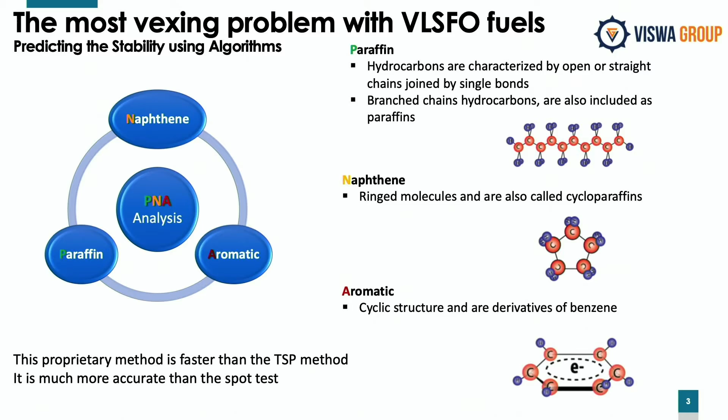So the most vexing problem with VLSFO, as you all know, is the stability issue. It's not easy, because when you take the fuel in, everything deteriorates. TSP values go up, and then you find that your purifiers are choking, your filters are choking. So the stability, which is the ability to stay stable during long-term storage, is not happening.

So, from the Viswa Group, I can say that we have developed a proprietary algorithm based on PNA studies, paraffin, naphthene, and aromatic content in the fuel. We are able to predict what will happen to the fuel, and whether it is safe for you to bunker it for, let's say, 30-day usage or 60-day usage. And we also are in a position to recommend some additives which will help.

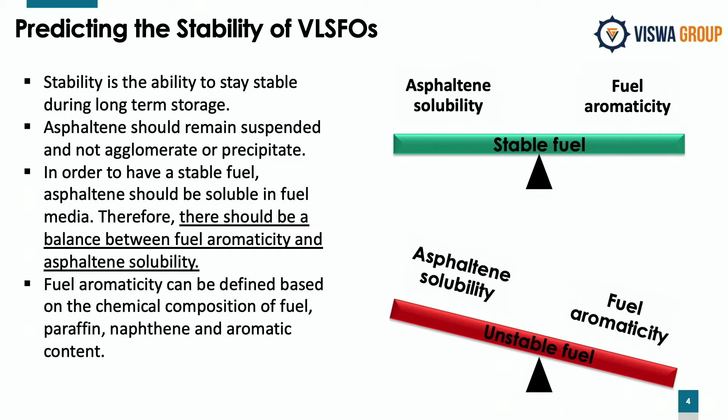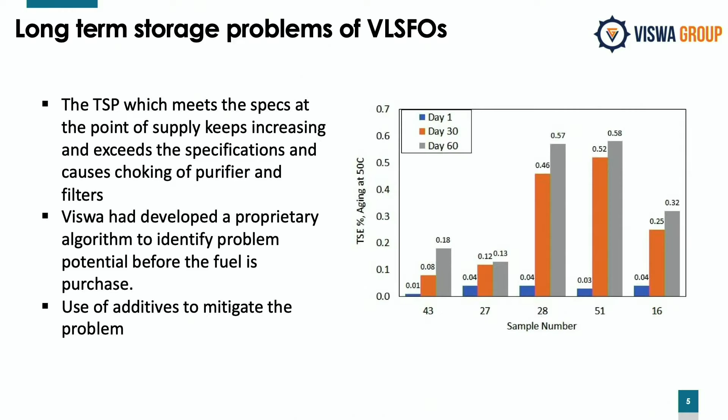Next one. So long-term storage is a big problem because this is completely out of the control of the fuel buyer, because when he's buying a fuel which is in spec, but after 2 weeks, 3 weeks, he finds that it's gotten out of spec and he's experiencing all the problems. So how to solve the long-term storage problem, how to look at the sediment problem, how to look at the cold flow problems - these are all the problems of VLSFO, and we can't say that we have completely solved it. There are a lot of problems, and we need to address them and find solutions.

The next one. So what's the future scenario? In fact, this is the one that I wanted to start this thing. So IMO was afraid that 2020 was going to be the Y2K of ocean shipping. This did not happen. Then they predicted a high spread between high sulfur fuel and very low sulfur fuel. That did not happen. They said it would be $250 to $425, but it's kind of $50 to $60.

So if it was high, then it was supposed to trigger a huge number of scrubber installations. Now, because the spread is only $50, $60, return on investment on scrubbers is 4 to 5 years, not at all attractive. So in the past 8 months, no fresh scrubber retrofit deals have been signed. There have been deals signed on new ships, but not any retrofit.

So COVID has trumped all predictions, and COVID stopped the complete airline industry. 70% of the planes are idle, so there is plenty of jet fuel that is being pumped into the VLSFO fuel, bringing down VLSFO price. It's being added on to the distillate fuels, bringing down distillate fuels. That's the reason why VLSFO fuel and distillate fuel are almost at the same price. And jet fuel recovery will only happen when the airline industry recovers, and they're predicting another 2 years for that.

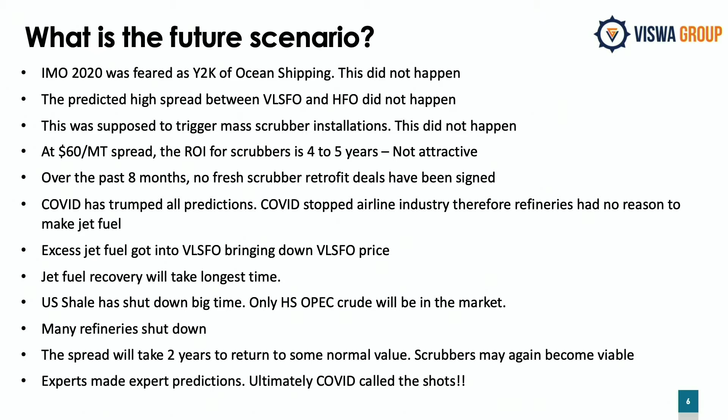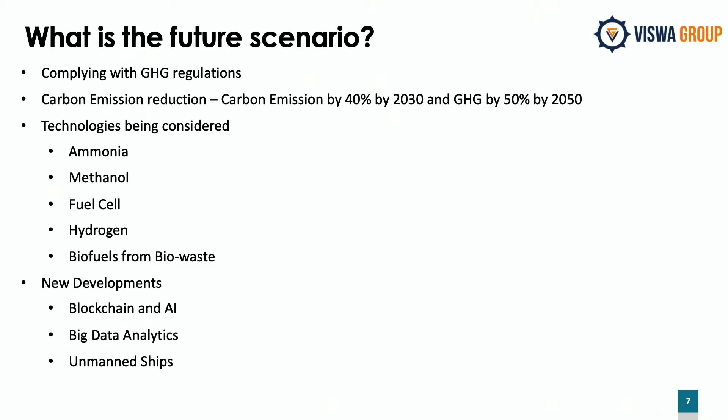The GHG regulations are coming in, even before these regulations have settled in, with carbon emission reduction targets of 40% by 2030 and 50% by 2050. Technologies being considered include ammonia, methanol, fuel cell, hydrogen, and biofuel from biowaste. The industry is also experiencing new developments like blockchain, artificial intelligence, big data analytics, and unmanned ships. All of this is going to make this industry nothing like what it is today, very, very different.

The next speaker is Dr. Aparna Balachandran from Viswa Group. She's a director at the company. Go ahead, Aparna.

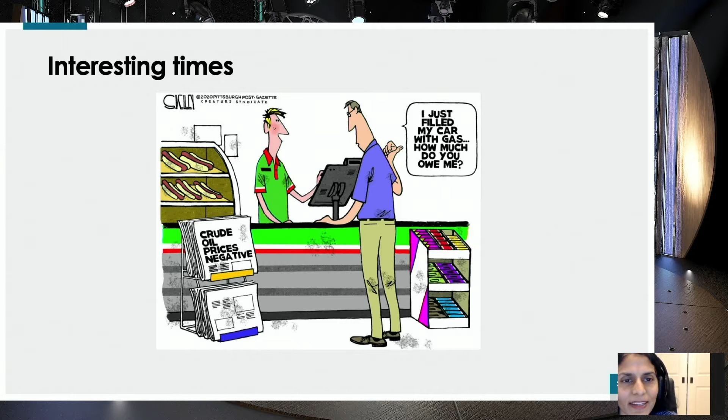On a more serious note, the topic I'm presenting today is 2020 VLSFO fuels. Specifically, what is the current situation? What are the benefits and disadvantages of this fuel? And what are the solutions to solve these problems? Next slide.

First, let's define what an average VLSFO looks like, and can we truly characterize it? On the slide you can see the average values for some of the ISO 8217 parameters. For example, the density is 936, the viscosity is 106. But if you look at the maximum values, these are much higher, and this represents a wide range of what is considered normal for VLSFO fuels. The bottom line is that VLSFOs are a heterogeneous group with lots of parameters that range widely, and they're all clubbed into one group. Next slide, please.

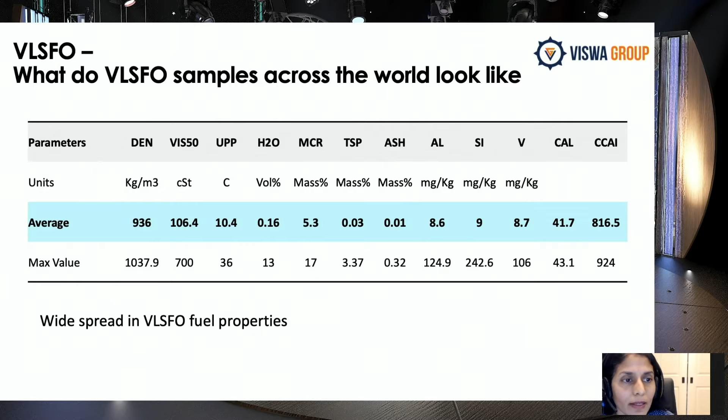Based on our testing of more than 50,000 samples in 2020, we found that VLSFOs account for 59%, distillates were 31%, HFOs 8%, and ultra-low sulfur fuel oils were 2%. You may wonder why distillates account for such a high percentage. There are many reasons, including the crash in oil prices, COVID, and jet fuel availability, as Dr. Viswa had alluded to. Viswa has done a lot of research and published white papers on the quality of VLSFOs, and we've put together a comprehensive compendium which covers all aspects of VLSFOs. Next slide, please.

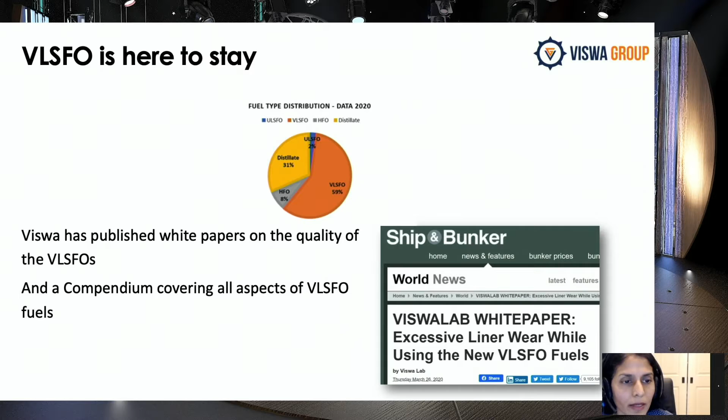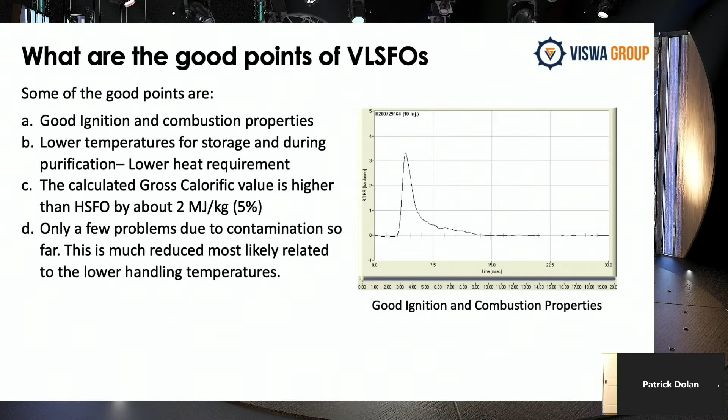So what are the benefits of VLSFOs? The paraffinic VLSFOs have good ignition and combustion properties. Almost all VLSFOs require a lower temperature for storage and during purification, leading to a lower heat requirement. The calculated gross calorific value is higher than HSFOs, leading to a 5% increase in thermal efficiency. And only a few problems have been seen so far related to contamination from polymers, and this is much reduced, most likely related to the lower handling temperatures required for VLSFOs. Next slide.

Long-term storage problems have accounted for almost 80% of VLSFO-related problems. There are two ways to identify them: one, which is a little more logistically challenging, is to let the fuel be stored and then tested prior to usage. The second way is to do predictive modeling and use proprietary algorithms prior to using the fuel and storing it. This can be done at Viswa, and we can predict whether the fuel will stay stable for the long term or not. Some additives have helped if they're dosed adequately at the start, prior to storage of the VLSFOs.

The next most frequent problem we noted was cylinder liner wear, which I'll discuss later. The third problem we saw was cold flow properties and wax formation in tanks. The important point here is that pour point is required by ISO 8217 testing, but our data analytics showed that pour point had no correlation to the wax appearance temperature. So if the fuel could not be heated, wax formation could happen. And the key to remember is, in the unlikely and unfortunate situation that wax does form, the fuel has to be heated to a higher temperature, called the wax disappearance temperature, prior to being used.

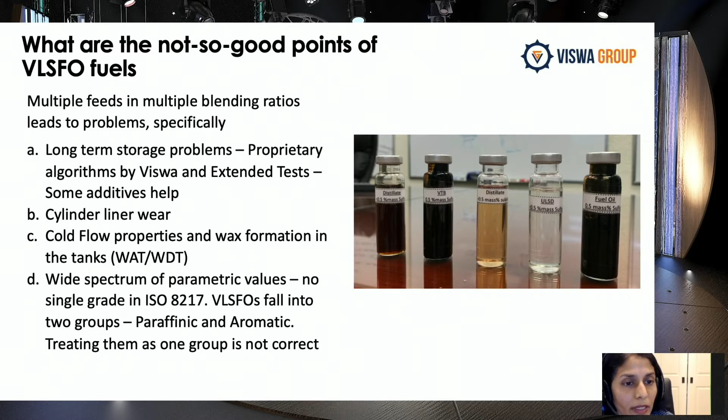So based on the problems faced by our customers and our experience, Viswa has published these technical updates and white papers relating to these problems. Next slide, please.

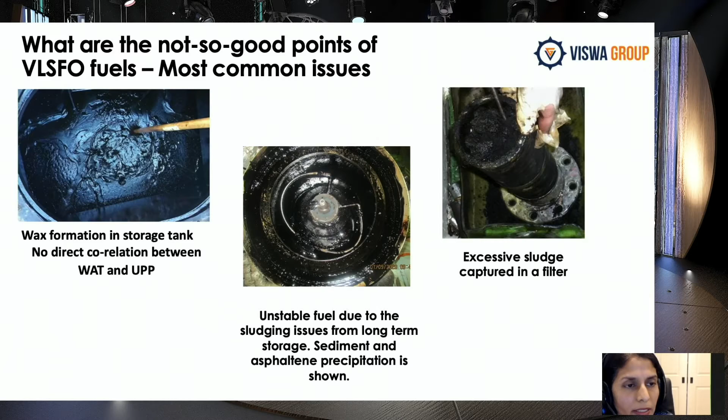This is what problems with VLSFOs look like, with wax formation on the left and unstable fuel from long-term storage causing sludging issues on the right. Next slide, please.

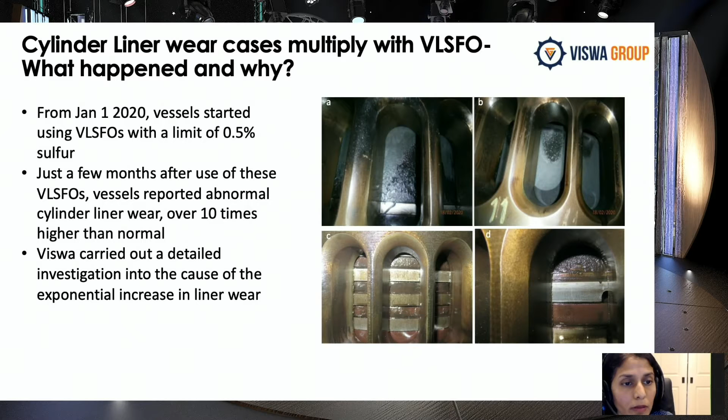To touch briefly on cylinder liner wear, what was noted was in January 2020, VLSFOs were used with a limit of 0.5% sulfur, and vessels started reporting an exponential increase in cylinder liner wear. This was quite puzzling to everyone. Next slide, please.

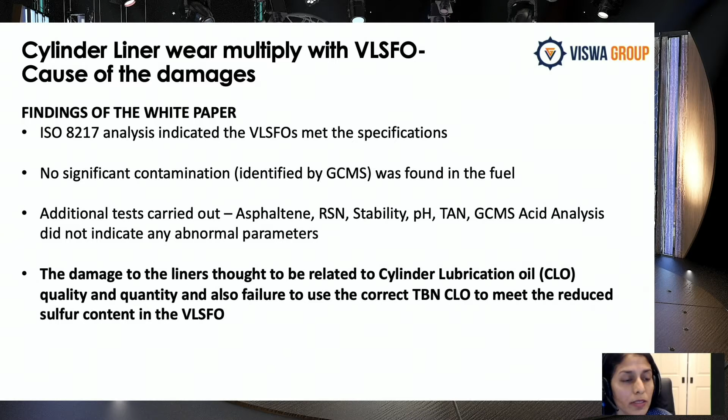The ISO 8217 analysis indicated that the VLSFOs had met the specifications. Additional testing was done, and none of these indicated any abnormal parameters. So finally, it was concluded that the damage to the liners was thought to be related to cylinder lubricating oil, both the quality, the quantity, and the failure to use the correct TBN cylinder lubricating oil to meet the reduced sulfur content in these VLSFOs.

Next slide, please. I want to close with a summary of what I have presented. VLSFOs will probably be used widely in the near future. Given that they're a heterogeneous group of fuels, they should be used carefully and with a clear understanding of all their different properties. I want to thank you all for your attention.

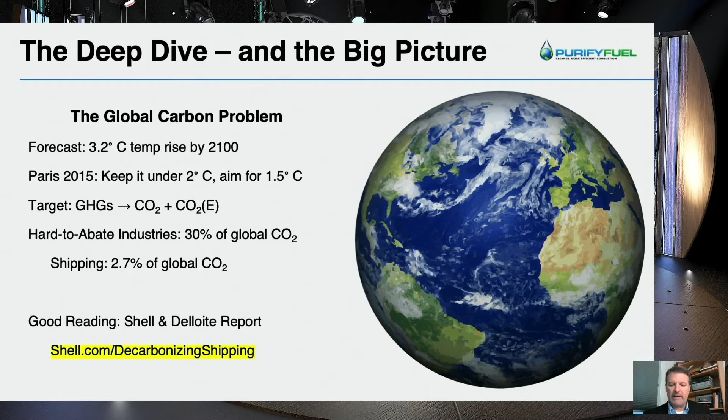So we note that all global carbon emissions, 30% of those are considered hard to abate industries, of which we're one of them, shipping, and we're 2.7% of the global CO2 problem. I want to point out one good reading item here that I pulled some of these numbers from, and that's the Shell report that they did in conjunction with Deloitte. Just Google Shell and Deloitte and decarbonizing shipping, very useful. Okay, let's go to the next slide.

So bringing this home to our industry, there's a lot of good ideas out there, but very few clear pathways, at least today, to pursue, and a lot of compromises that come with those even. We've got billions of dollars tied up in marine power plants and burning lower sulfur distillates and residual fuels. We just cleared a major hurdle this year with the IMO 2020 with the sulfur regs.

We're still working out some issues with the replacement fuel, which is VLSFO. Dr. V can give you a lot more information on that. We don't control the supply chain of energy. We've historically been buying the lower end of the hydrocarbon value chain in IFO, and we kind of have to take what we get. This has been a hurdle, not just for us, but also for the people that produce the fuel, the refining industry.

The IMO's focus over the last decade has been reducing sulfur, which has been helpful to human health, with a bit of environmental benefit, but now they've really turned their attention to carbon. From baseline levels in 2008, the IMO is thinking about a 40% reduction by 2030 - that's a pretty big first step. Then getting up to 70% off this 2008 baseline, with a specific breakout of 50% for greenhouse gases. There's a differentiation between carbon and greenhouse gases, even though one is the other - certain gas emissions have a much higher weight, and you'll see a result of that later on.

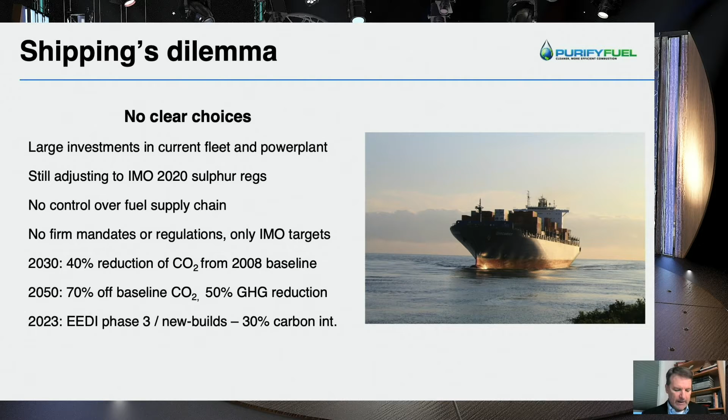So let's look at some areas to focus on. This is where work is already underway. We can look at hard technology advancements. We can look at alternative fuels - less carbon intensive, all the way to carbon neutral. We can look at improving what we have now, and I'm going to spend some time on that. And of course, the last option is not really an option.

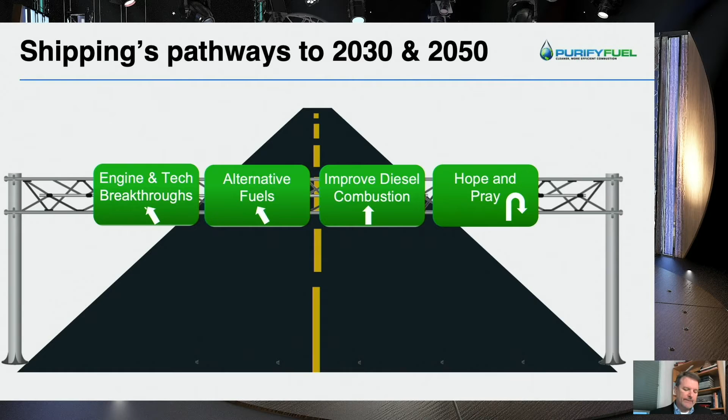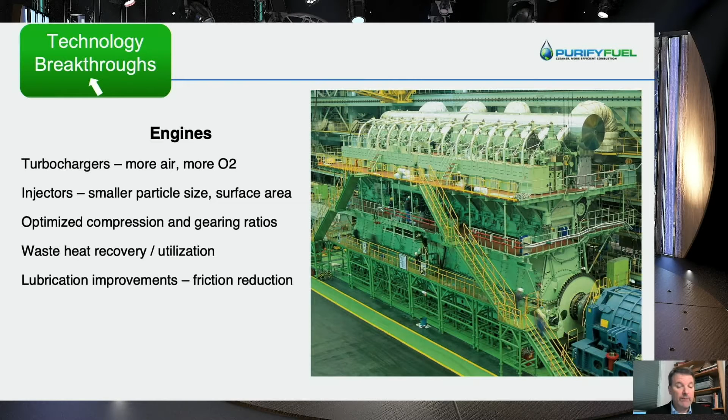Touching on the first area - technology breakthroughs. Lots of capital and R&D has been spent and continues to be spent making these incredible, huge engines that power these ships. Advancements in turbochargers and injection systems have helped improve combustion, and we're even harnessing more of the heat energy that goes up the stack to power other shipboard needs that would otherwise be parasitic loads on the engine. Advancements in friction reduction and lube oils have helped save energy and extend the life of these big investments as well. I don't have individual numbers for these things, but every single digit improvement in technology breakthroughs is going to help us get there. Keep in mind, we're heading for 40% in carbon reduction.

There's all kinds of other cool ideas that have been introduced, and some reintroduced. You see articles about hybrid power, LNG, new propeller design, and hull design. I'd remind you that picture to the right, the bulbous bow, is only a few decades old, and it was a big improvement in hull efficiency.

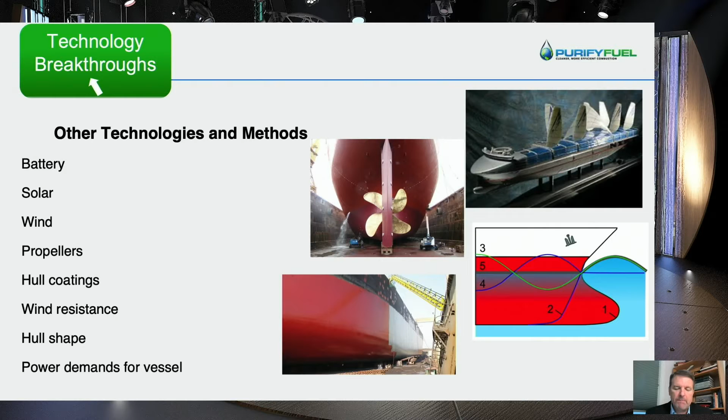The session after ours today is going to cover some of these specifically in depth. I just mentioned LNG, but there's also other alternative fuels being looked at much more closely, including hydrogen, either through combustion or through fuel cells. We've got ammonia, which is a large carrier of hydrogen, methanol, biofuels, and even nuclear. They'll get into that in the next topic.

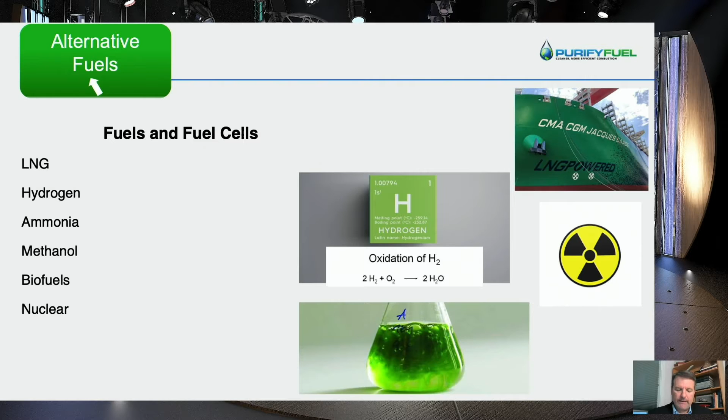Theoretically, a drop of marine diesel or IFO has a finite amount of potential energy when it runs through an engine. How much of that can we harness by running it through an engine that has limitations right up front? You can see that 100% theoretical is truly going to be about 75% theoretical because of heat, friction, and inertia. Due to the nature of diesel combustion, the cycling of RPMs, and varying loads, you can see what different modes of transportation using diesel get today. Cars and trucks, because of RPMs and cycling, locomotives and tugboat engines are getting around 35 to 40%, and large ships - two-stroke, slow-speed, large diesels - are actually in the 40s and even approaching 50%.

But that still leaves 25% room to improve. So the question is, do we keep working on engine design with a lot of money and R&D - which I recommend we do? But what about fuel? We haven't really talked much about that. I'd say that except for the sulfur that's come out of it, the diesel we're burning today is not that different than the diesel we were burning 10, 20, and 30 years ago. What we burn is a function of what is yielded by cracking crude oil into diesel and IFO.

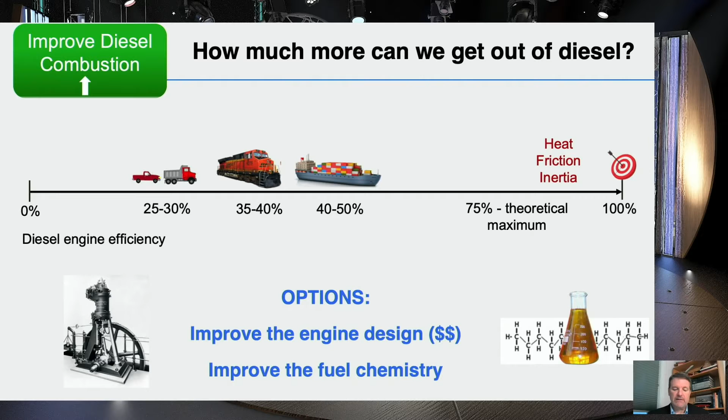With diesel, you hear about a couple of attributes of the fuel that have to do with its quality of burn, the injectors, and the ease of combustion. Cetane and lubricity are two of the things in our product, but we've also added a third: a nanoscale cerium oxide that acts as a catalyst for oxidation. That's really been the game changer for us.

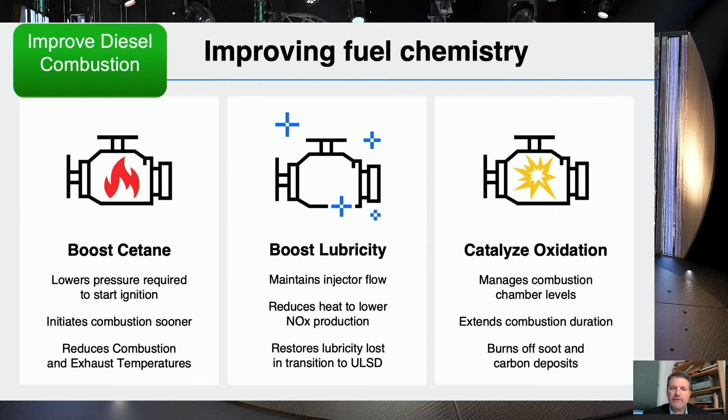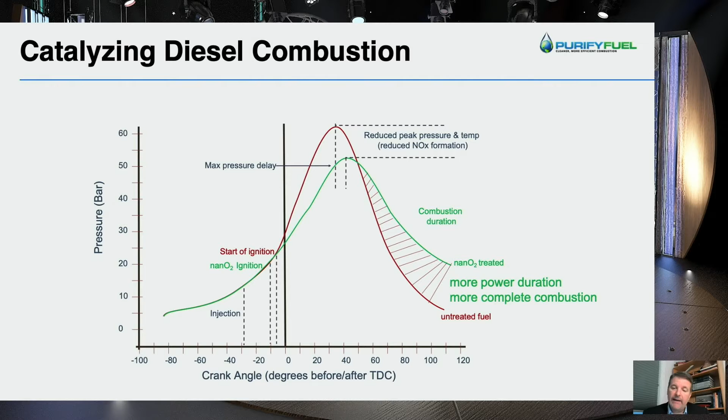The numbers that come out of this are pretty noteworthy. This shows two independent, third-party tests done in controlled environments. One on a four-stroke engine, a smaller one done at the Houston Advanced Research Center, conducted at UT Austin, and another done at NRE Power Systems on a dynamometer down in Houma, Louisiana.

On an EMD 3,000 horsepower two-stroke, the upper white box shows our fuel savings at different engine loads. You'll see those range anywhere between about 6.5 to 14% on the four-stroke and about 7.5 to 10% on the two-stroke. What's really interesting is the lower box shows you the emissions reductions that we noticed.

Particulate matter, or soot, is in the 50s. Carbon monoxide, which is an indirect greenhouse gas, is in the 17 to 30% area. NOx we measured on the NRE test at 20%, which is a big chunk, and the VOCs we measured on the four-stroke.

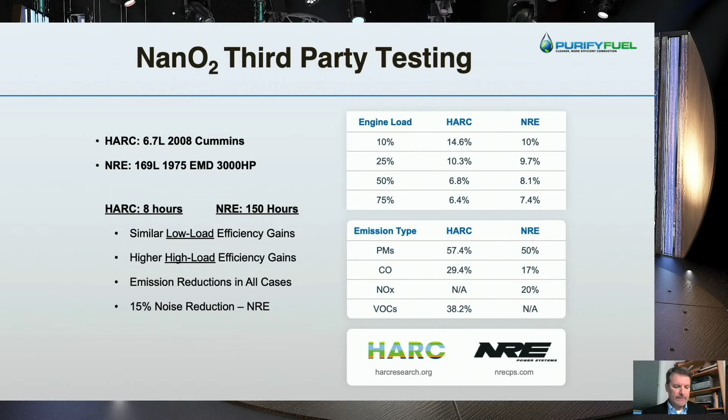So those two independent tests are at the bottom of these rows, and above that we've got actual field study tests that were done in our fracking and drilling and mining, coal hauling industries, as well as short line railroad.

The first column was filled in for all of these, ranging anywhere between probably 8% all the way up to a noted 17% in terms of fuel savings. Many of these industries enjoy the fuel savings, but the workload improvements are even better because they can take mechanical advantage, not just the chemical advantage of the combustion.

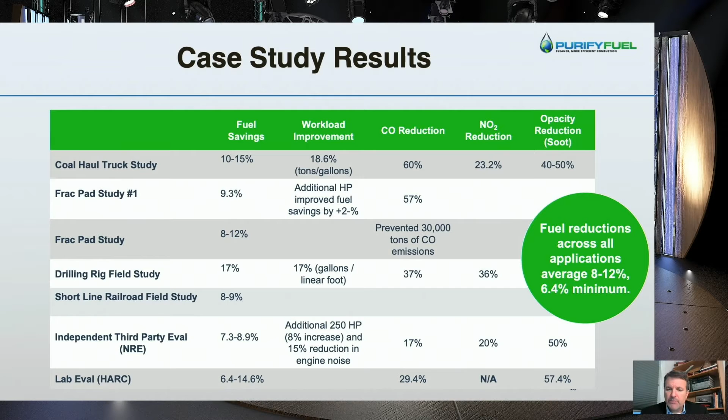Carbon monoxide reductions anywhere between 37 and 60%, NOx reductions, NO2 in this case, and then opacity. So in the field, we seem to do even better than in the lab, which is very encouraging.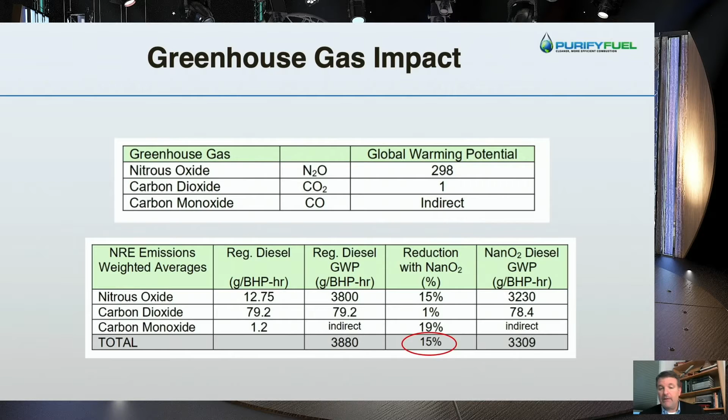Remember, we're targeting 40% by 2030. If these numbers hold, and they do through all the different tests and all the different gases that we measure, this shows that we are about 15% towards the 40, which is a pretty big chunk right up front without any capital investment.

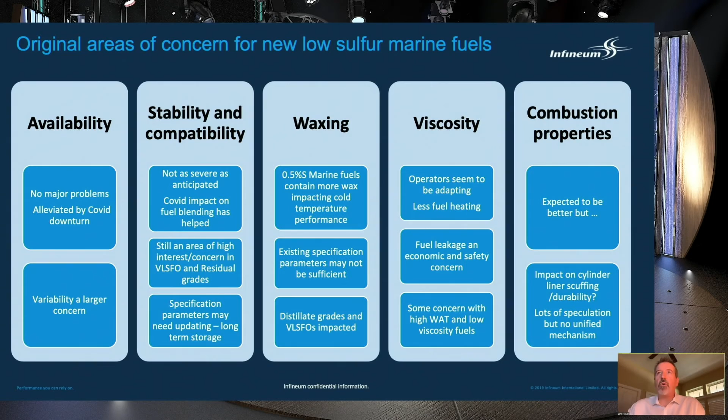So this is an area about what's going to happen now. What's the industry guidance in these areas, and where can additives help? In terms of stability and compatibility...

The total sediments test is still the only real measure available of fuel stability. The TSP test is the reference. Guidance has been published by CIMAC, and that has been well accepted by the industry. But some of the tests that people are using out there in the industry are simply not suitable, and CIMAC have pointed those out.

In fact, if we can go to the next slide—oh, there should be another slide after that.

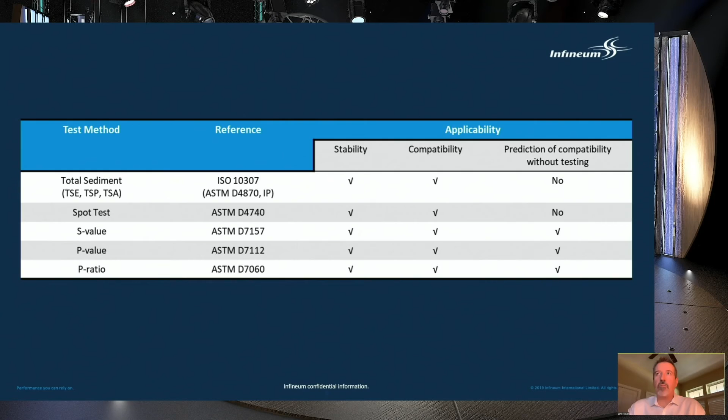Additives can have a major positive effect on these parameters, but as Dr. Apana described before, they are best if added early in the fuel production and/or blending process, because they have to work on stabilizing any asphaltenes or insoluble materials early on, since it's very difficult to reverse that process once it has occurred. It's not impossible, we've seen additives do that, but it's way better if you can do it as early as possible.

I would say beware of tests that use unrealistic solvent dilutions to enhance the apparent impact of the additive effect. There are some tests out there using solvent dilutions, heptane or toluene, of up to 30 to 1. That can show you some very good response, but we do not believe it is applicable in the real world.

In the waxing area, ISO 8217 has already been changed for the distillate grades, recognizing the need for more performance, so Cloud Point and CFPP are now reported requirements under 8217. We're now seeing similar issues recognized for some VLSFOs. There can be solidification between the wax appearance temperature and the pour point, and that's not good — a ship can't use a product that has gone solid in the tank. Cold flow additives, of which Infineum is the largest supplier in the world, can provide effective solutions for these marine fuel waxing issues. But again, there are lots of different types of fuels, so it's not a one-size-fits-all approach.

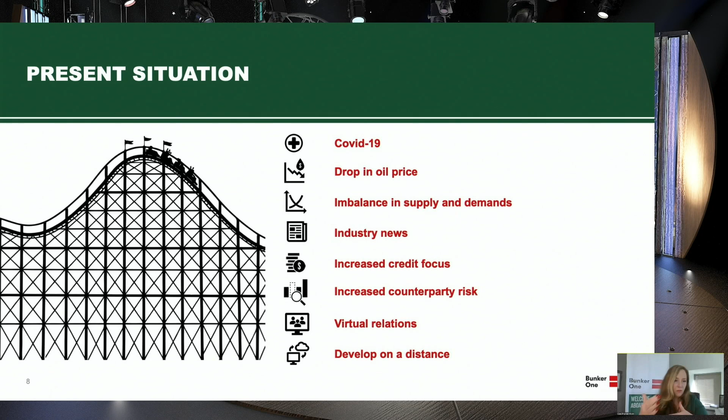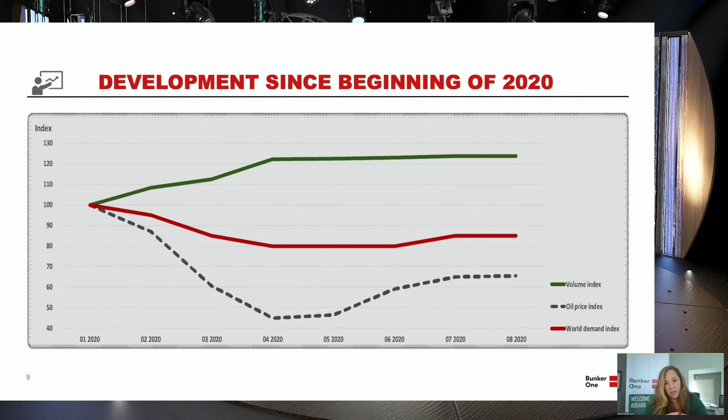On an overall basis, I think of all of these things, the most important on this list is that it's about partnerships that are developed. These partnerships across the board, again with our testing labs, with our engagement with the high quality of the crews that people are finding needs to be increased, how they are handling it, with their involvement with the hardware systems, and across the board. Those are probably the most important.

Developing new products into the future. We're in the very beginning of the very low sulfur fuel oil. Now, as we are looking at what our next goals are into 2030 and 2050, those communications and those developments are going to be even more important than ever.

All of that is common sense that's up there. One of the things that is most important is making sure that across the board, we have checks and balances. Many of my supplier counterparts probably would not be very thrilled with me having those statements, but it is extremely important, this checks and balances.

These feedstocks that come off from different areas all have different components that have been presented already. Making sure that we understand what those compatibilities are, and also having the transparency not only from us as a supply partner, but from the vessels that we are fueling. And if there are problems, making sure that we're in those communications, not just pointing fingers saying this is your responsibility or this is your fault.